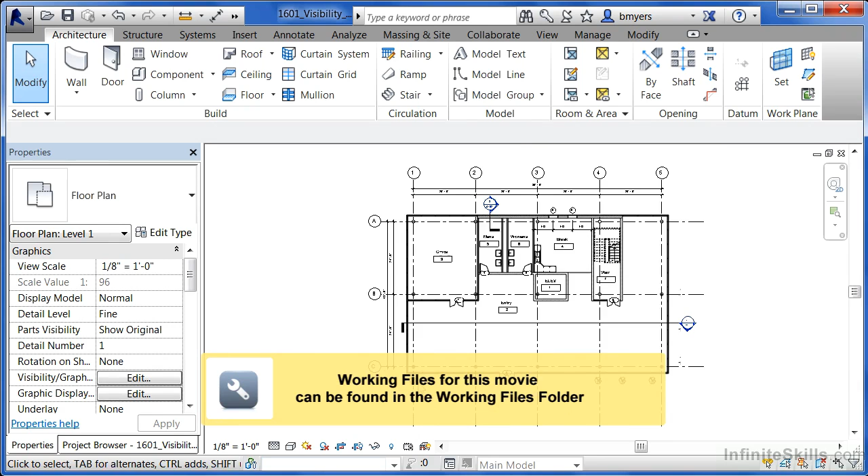The visibility graphics overrides in a project change the way that an object displays in a specific view. In this case, different kinds of curtain walls have different line thicknesses, whether it's associated with mullions or whether or not it's a panel. Also, if we zoom back out, even our walls have different line thicknesses around here, while the pattern on the inside is a thinner line weight.

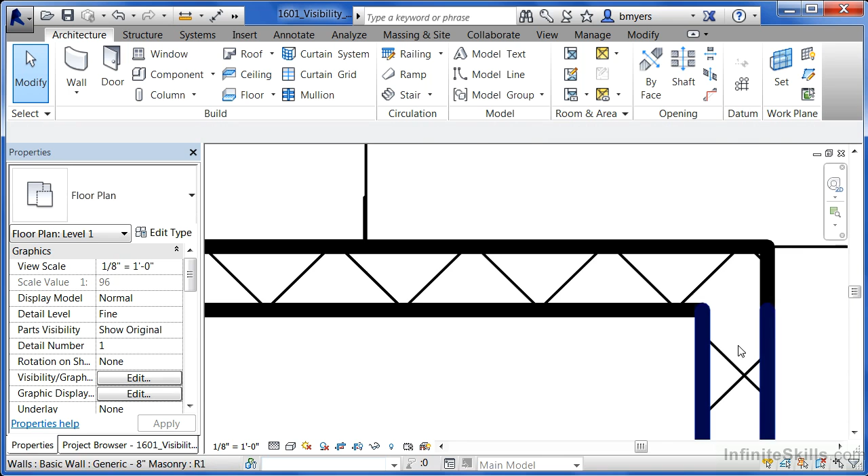Certain objects in Revit can actually have the colors of blue and green and red. You can give it any color that you want. So these do not have to be limited to being just the color of black like we've seen up to this point. Visibility graphics can assign those colors as well.

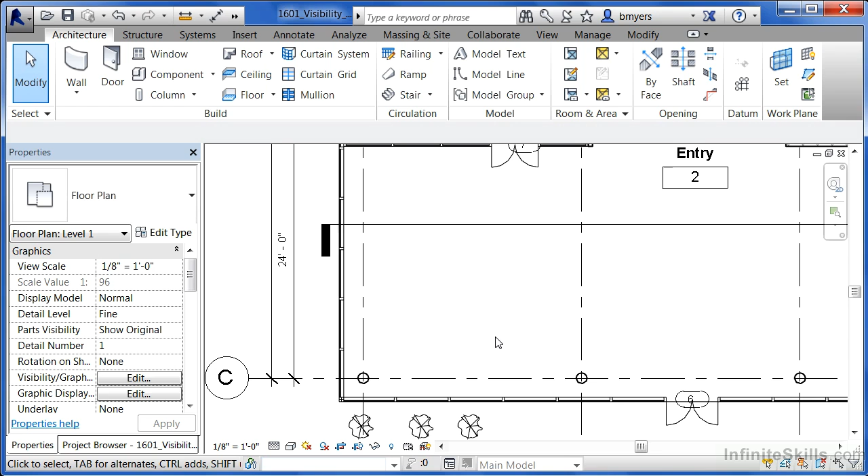Also, where we see the structural grids, this line style can be adjusted from being a center line to a hidden line to being a solid line through the visibility graphics and the properties underneath the visibility graphics for this type of object. Visibility graphics also control whether or not an object is on or off. So if you wanted to turn the dimensions off, or if you wanted to turn all of your walls off, you could do that through your visibility graphics.

Those visibility graphics settings can be accessed one of two different ways. You can type the letter V, like visibility, twice on the keyboard to bring up the visibility graphics dialog. The other way is underneath the properties of the view, select the edit button next to visibility graphics. And it brings up this visibility graphics overrides dialog box. It's called visibility graphics overrides because it overrides the default settings just in this one view.

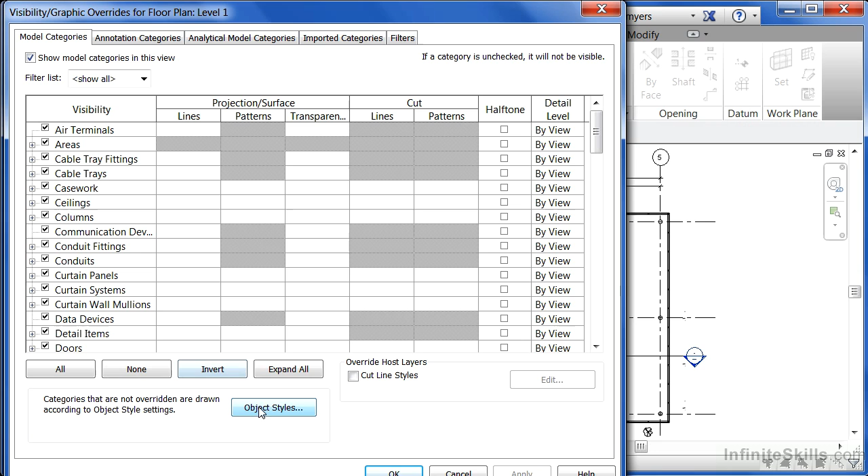If you want to change those settings throughout every view in your project, you can do that by selecting Object Styles. In the Object Styles, we can see such things as doors, walls, windows. Really, just about every object inside of Revit will show up here. In this case, if we take a look at walls, we can see that a line weight of 2, which is a very light line weight, is associated with these walls whenever they're in a projection view. Now, a projection view is usually associated with elevations. So if you're looking at it straight on, that's a projection view.

A line weight of 5, which is a much darker line weight, is associated when you cut through a wall. Cutting through a wall would happen in floor plan views because you're cutting through the floor plan through the walls at a certain elevation. Cutting through the wall would also take place inside of wall sections. So in wall sections and floor plan views, the walls are going to be darker, but if we're just looking at it in elevation, the walls are going to be lighter.

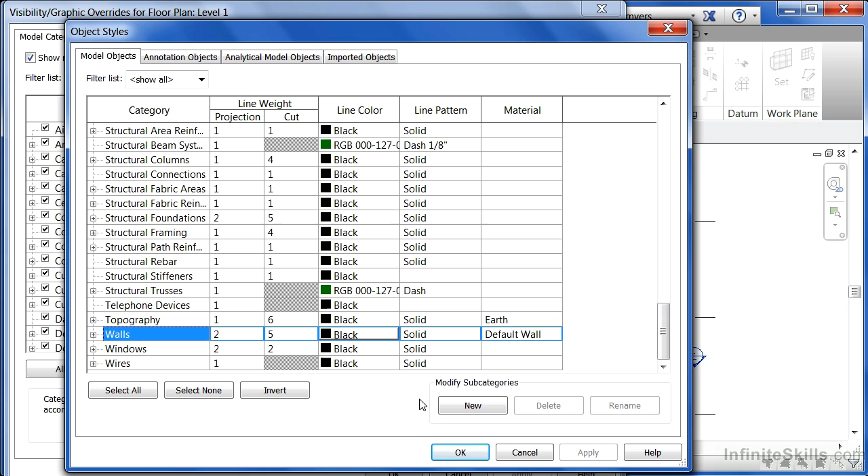The reason why the walls look the certain color that they do is because of the line color associated with those walls. We'll also see that there's a line pattern. This is the dash, solid, hidden. And if we click inside of this dialog, we can see a pull down of all the different line styles that are available to us. Now, this is the project-wide settings, and if nothing gets changed in the visibility graphics overrides, this is how the walls will display in every view in the project. Now I'm going to click on OK to that.

But if in the visibility graphics overrides, we said, in this view in the project, we want the walls to display different, we could do that. Scroll down to the walls, highlight where the category of wall is, and when you do, you'll see override boxes in each of these locations. For instance, underneath cut, this is where the wall section or the floor plan view would take place. I'm going to select overrides in the walls line. From here, I could override the line weight with any line weight that I wanted.

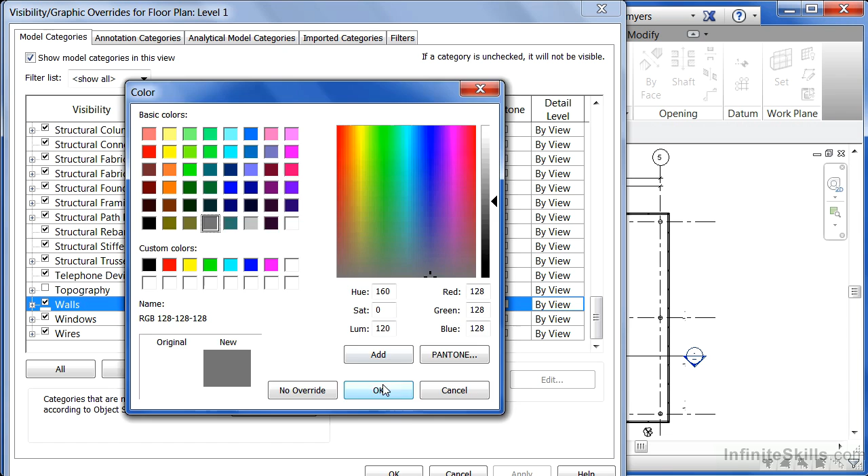I can make the color of the walls change. So I can make all my walls red or blue or green. I could change the pattern so that all my walls look differently. They wouldn't even be solid lines. They could be dash lines or hidden lines. Those settings can all be changed through here. And if you've changed them and then you want to come back and just wipe out any of those changes, you can always click on the clear overrides box to get rid of any of the changes that you've made.

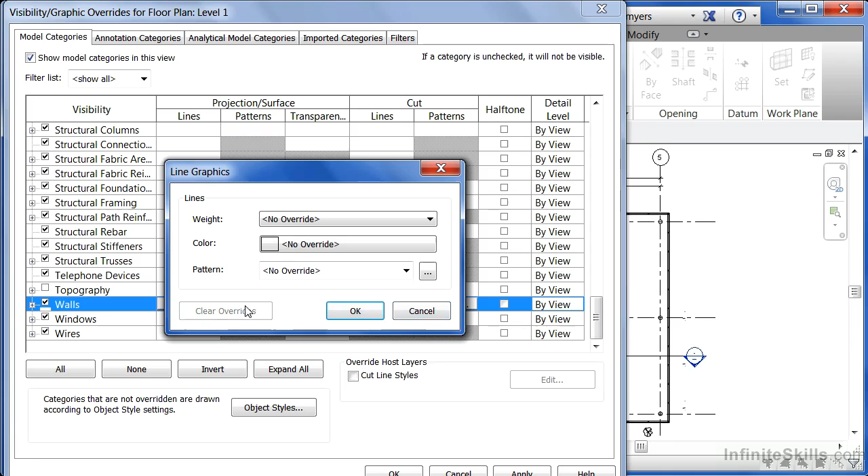In this case, I haven't really done anything, so I can either click on cancel or OK to this. Actually, it looks like I'd selected one of the line types, so it's showing up as the walls having a solid line type here. In fact, if I'd said red or dashed or any other properties, we'd be able to see that in this preview box right here for this particular override. In this case, though, I want to set it back, so I'm going to click back on the box, say clear overrides and click on OK. And now we can see that that override has been cleared out and it just says override again.

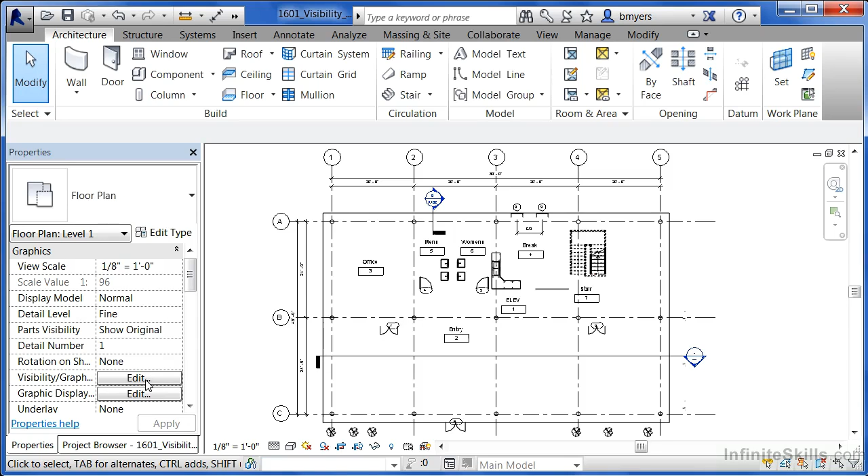Also, if I come over here and click the box right next to walls and clear out that check mark, and then come down to OK, we'll see that all the walls will now disappear in the project. Probably not what we want, but it gets the point across that if the checkbox next to that particular category is cleared out, those objects will disappear. But if there is a check in it, they'll show back up again. And we can see that if we go back into the visibility graphics, put a check back next to the walls category, and click on OK.

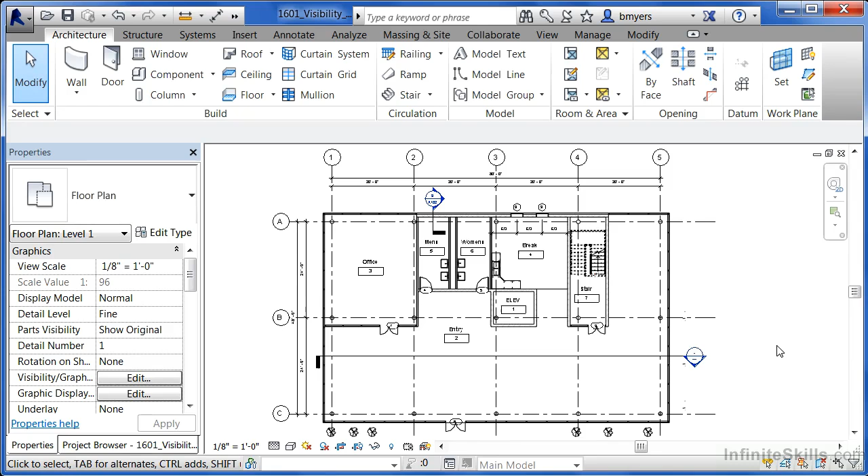So the visibility graphics overrides affect the way that each individual view displays. The object styles affect the way that objects display across the project, but the visibility graphics overrides will affect the way that those objects display in this specific view.